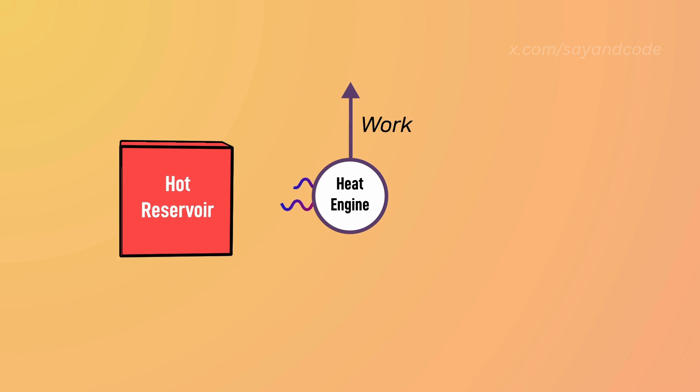A heat engine is any machine which converts heat into work. It takes heat from a high-temperature body, called a thermal reservoir, extracts some work, and then gives the remaining heat to a low-temperature body.

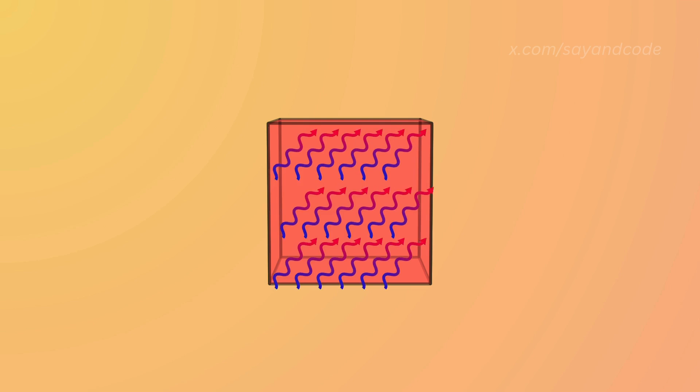A thermal reservoir is an ideal concept in thermodynamics. Just like how a water reservoir or dam stores water, a thermal reservoir stores heat. Similarly, like a dam seems to provide an infinite amount of water without becoming dry.

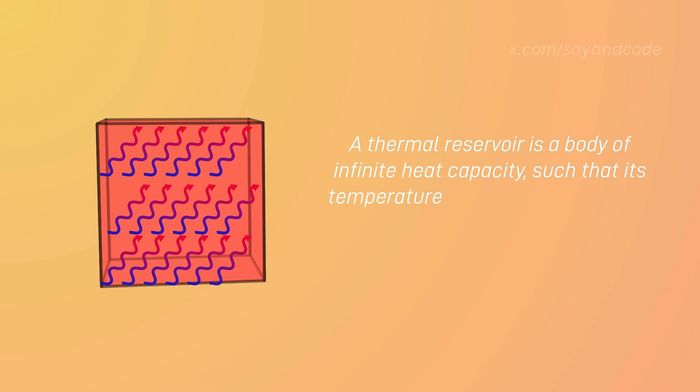A thermal reservoir provides an infinite amount of heat without losing its temperature. In formal definition, a thermal reservoir is a body of infinite heat capacity, such that its temperature does not change when heat is extracted from it or supplied to it. In thermodynamic calculations involving a heat engine, we use thermal reservoirs as a heat source and heat sink. No matter how much heat we extract or supply these reservoirs, the temperature remains constant.

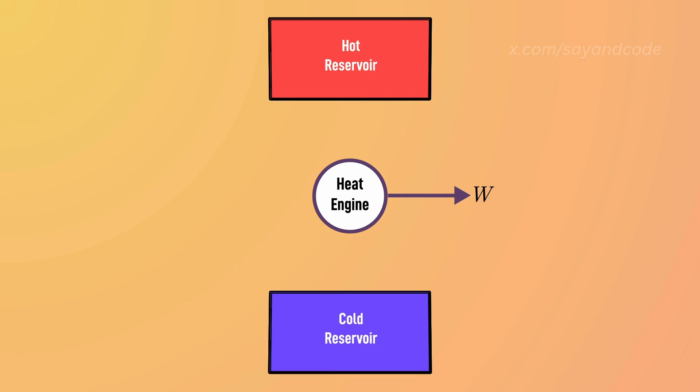Work extracted by a heat engine is the difference between the heat supplied by the hot reservoir and the heat rejected to the cold reservoir. The thermal efficiency of a system is desired output by the input given. Here, our desired output is extracting some work, and the input we provide is the heat from the hot reservoir. But work output is the difference between heat supplied and heat rejected.

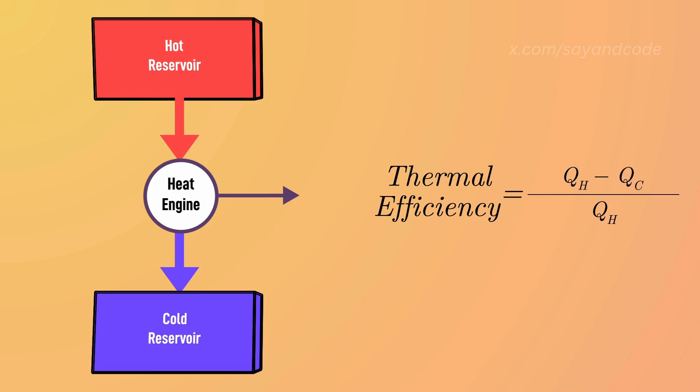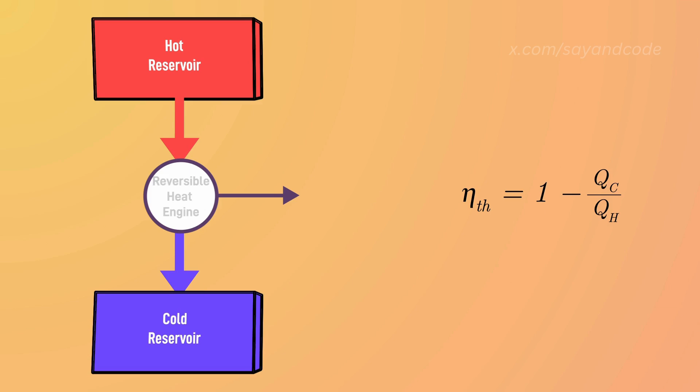So the thermal efficiency of a heat engine, denoted as eta sub TH, is equal to 1 minus QC by QH. For an ideal reversible heat engine, there are no inefficiencies. So the amount of heat provided or absorbed by a reservoir is dependent on only one factor, that is the temperature. So we can say that the heat provided or absorbed is proportional to the temperature. Then QH by QC is equal to TH by TC. And so the efficiency of a reversible heat engine is equal to 1 minus TC by TH.

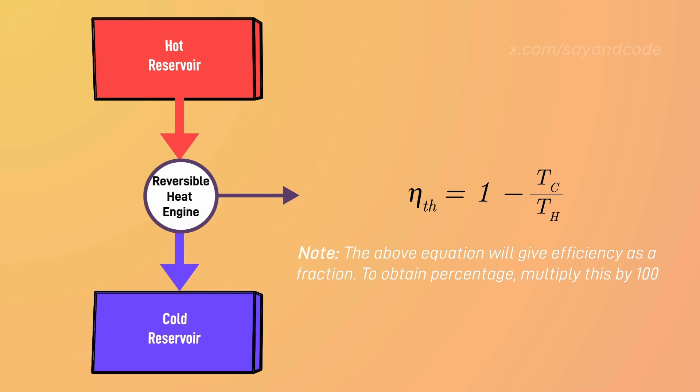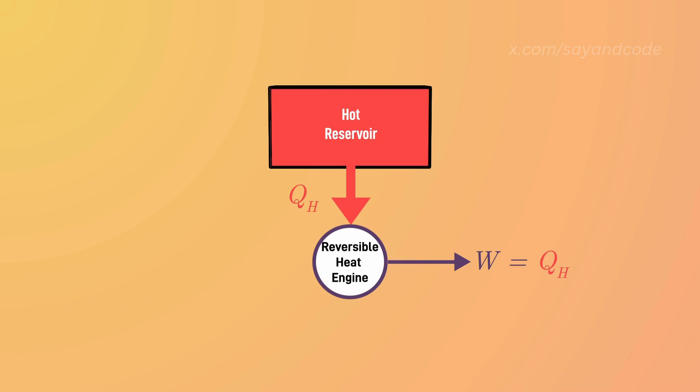A common question is, why is there a low temperature reservoir? Why can't we just extract QH as work completely? Or, why can't QC be equal to 0? This is where the second law of thermodynamics helps us. The only reason that the hot reservoir provides heat QH is because of the presence of a cold reservoir.

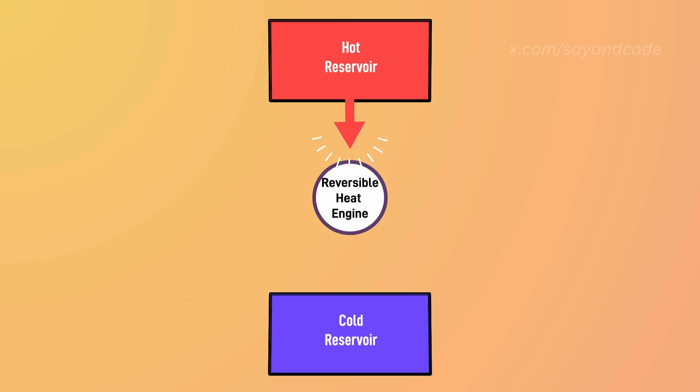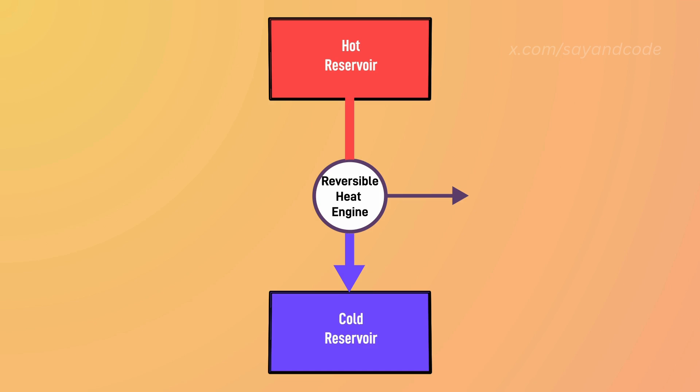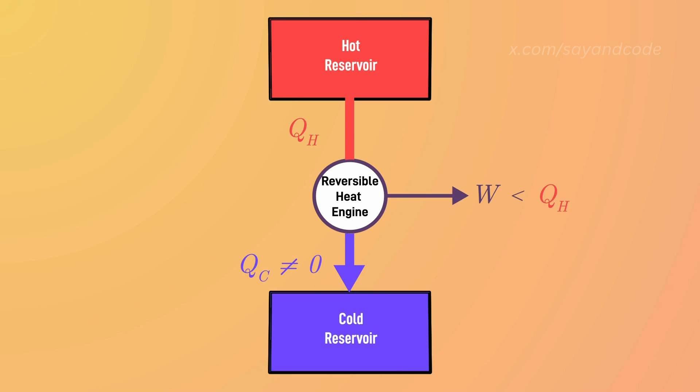Just like how in real life, heat only flows naturally from hot objects to cold objects, we need a cold object so that the hot reservoir will provide us some heat. For this reason, we will never be able to completely use the heat provided by the hot reservoir. There will always be some remaining heat that we reject. In other words, the efficiency will never be 100%.

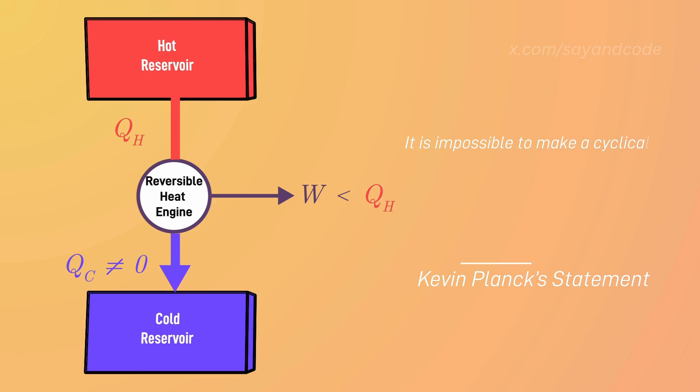This statement is known as Kelvin-Planck's statement. It is impossible to make a cyclically operating heat engine whose effect is to absorb energy in the form of heat from a single thermal reservoir and to deliver an equivalent amount of work.

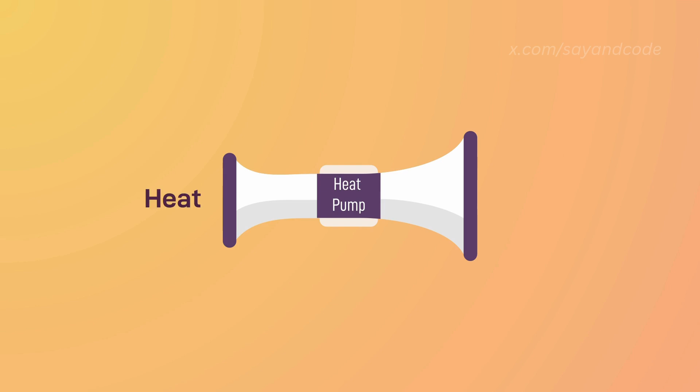Heat pumps and refrigerators are the opposite of a heat engine, so they are also called reverse heat engines. They are used to provide or extract heat from a reservoir by having some work done. If our aim is to heat up a body, then we call it a heat pump. If we're trying to cool a body, then we call it a refrigerator. Both work in exactly the same way.

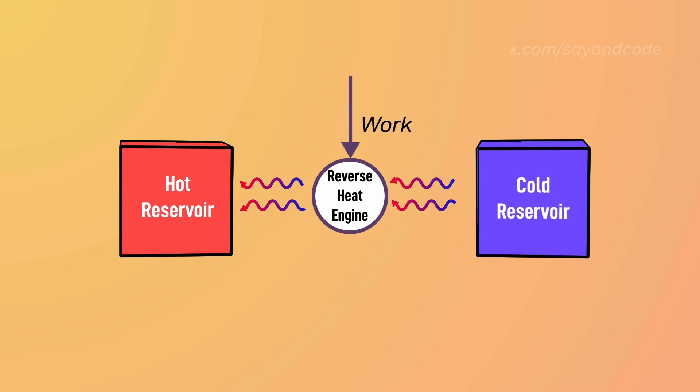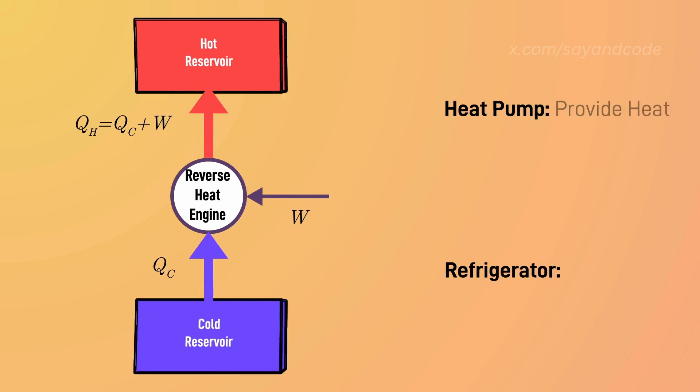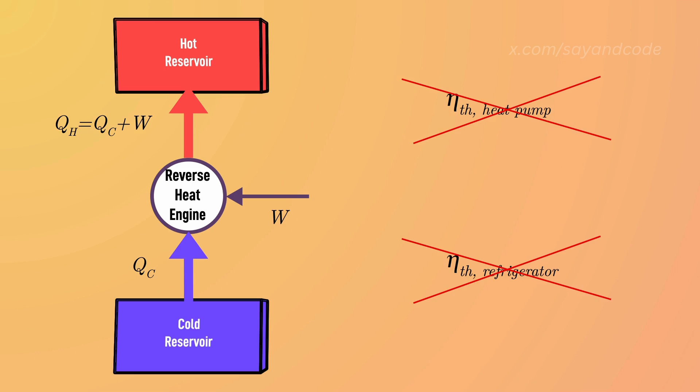Some heat is extracted from the cold reservoir, work is done on it, and a higher amount of heat is given to the hot reservoir. But since our objectives are different in both cases, the way we calculate their efficiency is different. Since we aren't extracting any mechanical work in this type of machine, we don't talk about the efficiency. Instead, we call it the coefficient of performance, or COP, which is the desired output divided by the input given.

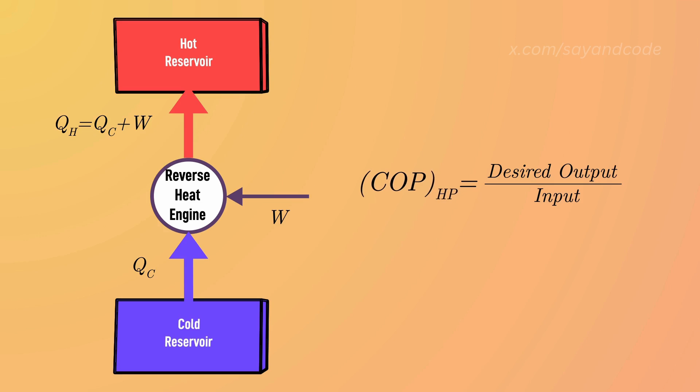For a heat pump, the desired output is the heat provided QH, and the input is the work done. But the work done is the difference between the heat provided and the heat extracted. So, the COP of a heat pump is equal to QH by QH minus QC.

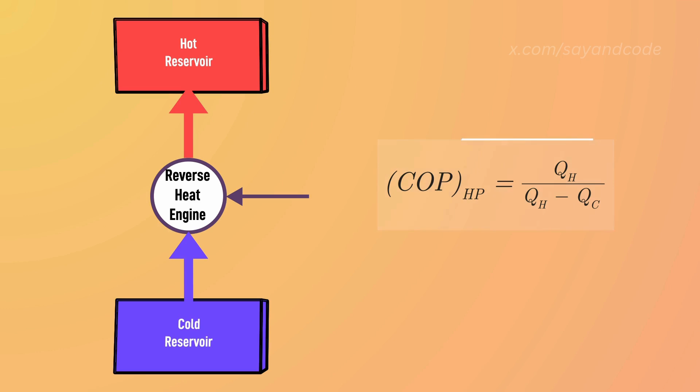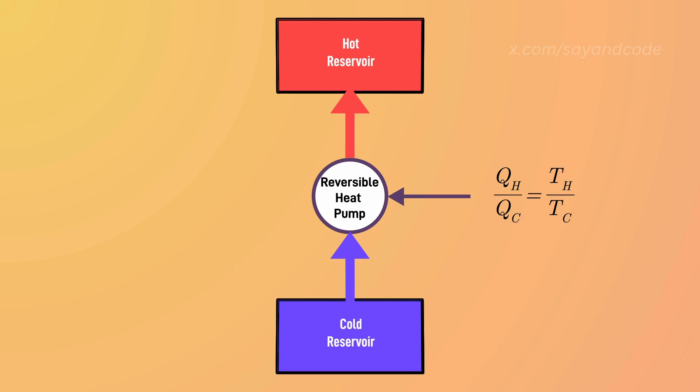For an ideal reversible heat pump, there are no inefficiencies. So the amount of heat provided or absorbed by a reservoir is dependent on only one factor, that is the temperature. So we can say that the heat provided or absorbed is proportional to the temperature. Then QH by QC is equal to TH by TC. Using some clever transformations, we can express COP as 1 divided by 1 minus QC by QH, which allows us to use the earlier equation in this one. And so, the COP of a reversible heat pump is TH by TH minus TC.

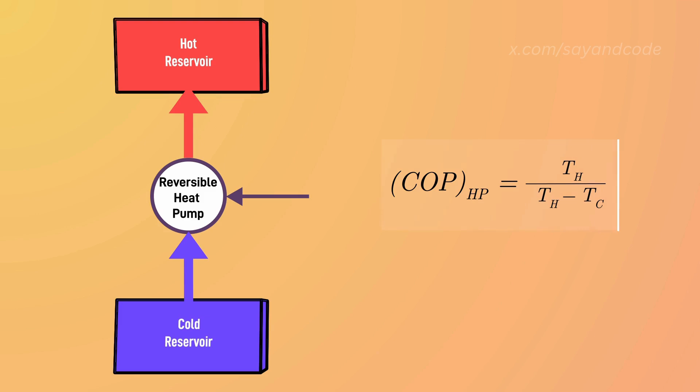If the same device is used as a refrigerator, then the desired output is heat extracted from the cold reservoir, QC, and the input given is the work done, which is equal to QH minus QC. So, the COP of a refrigerator is QC by QH minus QC.

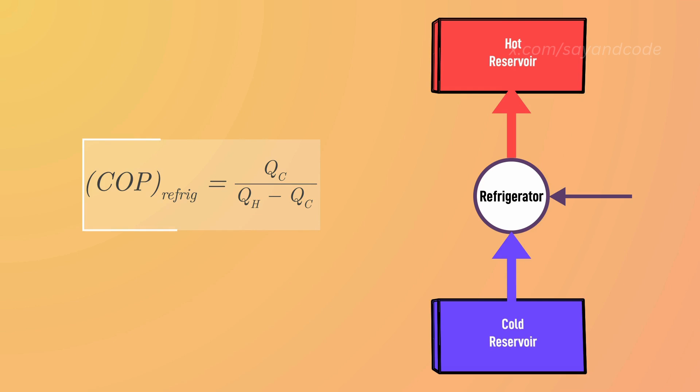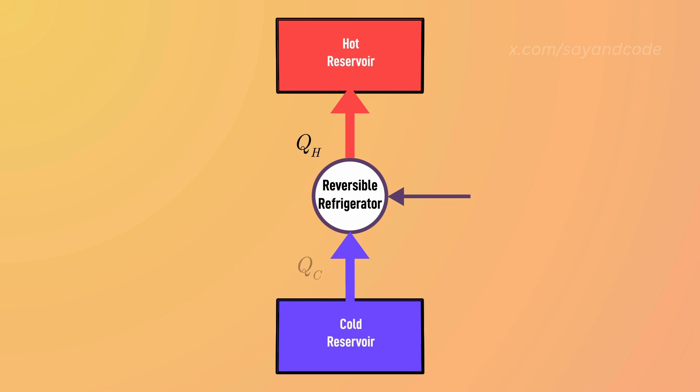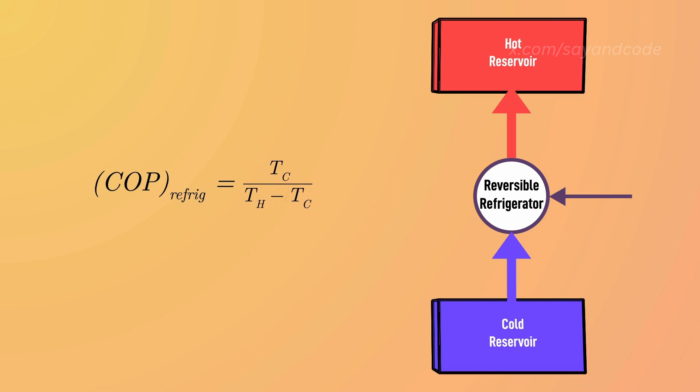For an ideal reversible refrigerator, there are no inefficiencies. So the amount of heat provided or absorbed by a reservoir is dependent on only one factor, that is the temperature. So we can say that the heat provided or absorbed is proportional to the temperature. Then QH by QC is equal to TH by TC. Using some clever transformations, we can express COP as 1 divided by QH by QC minus 1, which allows us to use the earlier equation in this one. And so, the COP of a reversible refrigerator is TC by TH minus TC.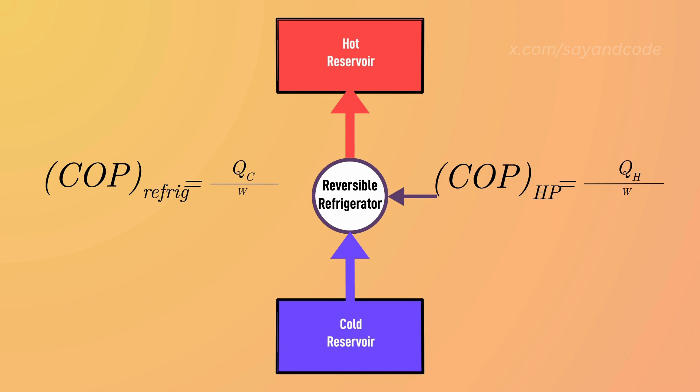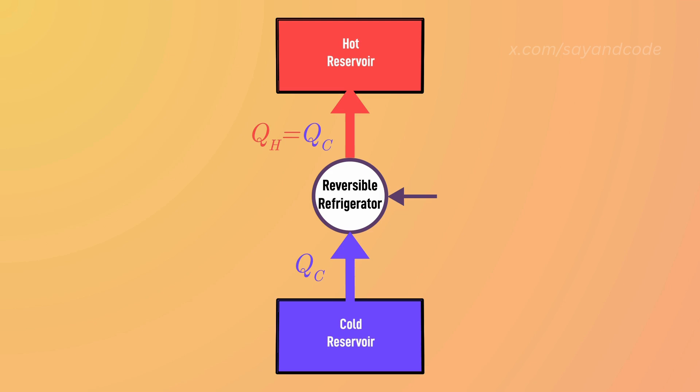Here, we can see that as the work done becomes smaller, the performance or the COP of the device will increase. So, if the work done approaches 0, then the performance approaches infinity. Or in other words, if we can extract heat from a cold body and supply it to a hot body without doing any work, then our COP is infinity.

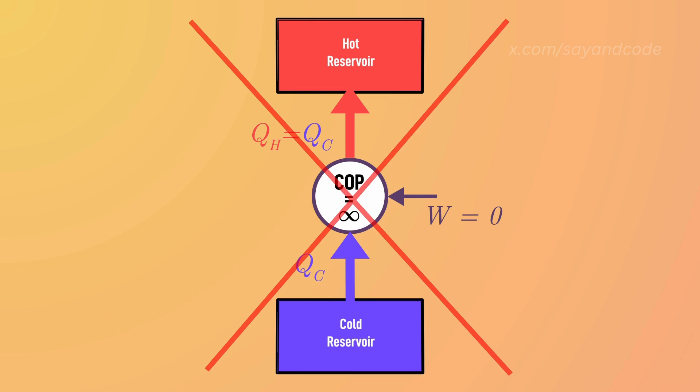But we know from the second law, and from common sense, that heat will never naturally flow from a cold body to a hot body. This is known as Clausius' statement. It is impossible to construct a device whose sole effect is the transfer of heat from a cool reservoir to a hot reservoir.